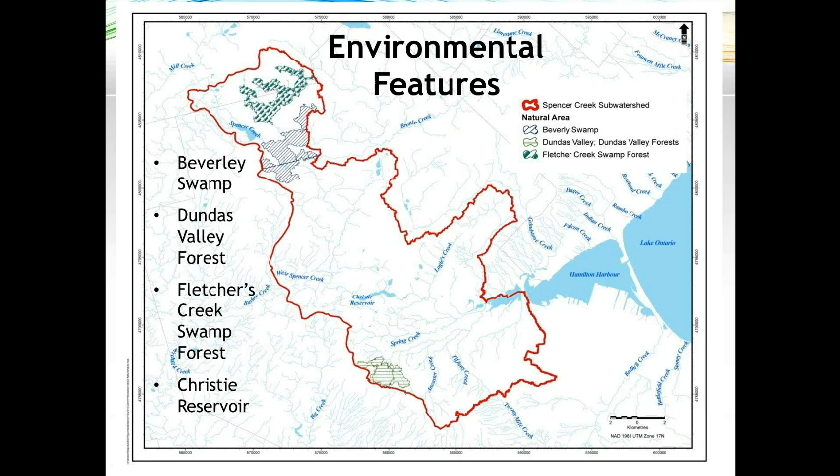So the environmental features that we wanted to look at are some of these large blocks of habitat. And so we have 2 wetland features, the Fletcher's Creek wetland and coldwater stream in the headwaters, the Beverly Swamp, which is a little bit further downstream, the Christie Reservoir, which is a small reservoir within the watershed, and then the Dundas Valley forests, which are closer to the mouth. So each of these features has some unique aspects of it that have potential to be impacted by climate change.

The Beverly Swamp is about a 2,300 hectare wetland, so that's about 5,000 acres. It has a very high quality forest swamp feature, which includes fairly rare Carolinian vegetation, typical of only a few locations in southern Ontario, and it provides significant base flow and water storage functions to the watershed. There also are a number of rare species of birds, plants, and amphibians.

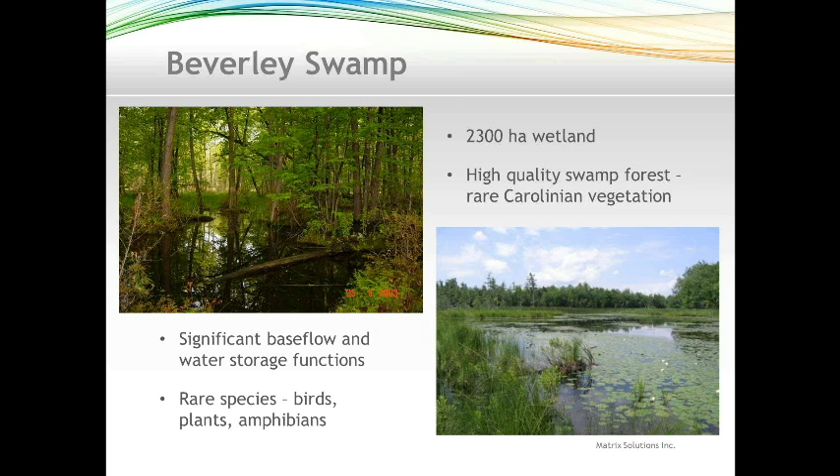The Fletcher's Creek wetland is about 1,000 hectares or 2,200 acres of wetland, and it includes a number of different wetland types such as bogs, fens, and swamps. Also important is that it's connected to a cold water stream that supports brook trout, and these streams are fairly rare or becoming rare in Ontario. In addition, there are already some threats from invasive species.

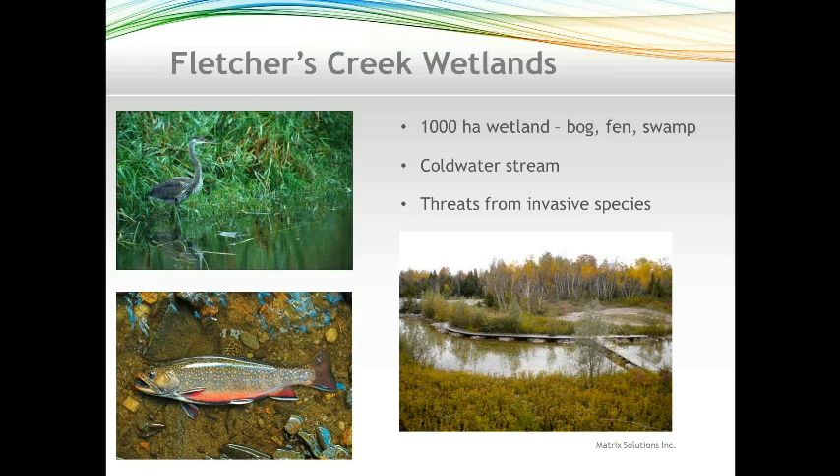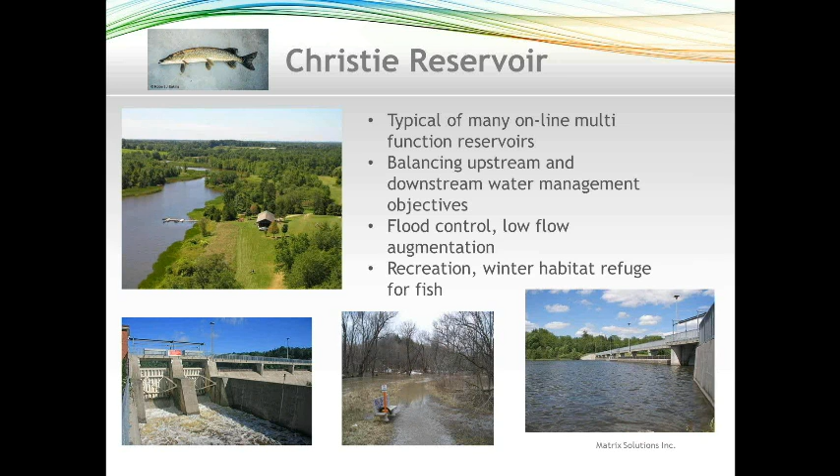The Christie Reservoir is a small reservoir typical of many online multifunction reservoirs in southern Ontario, and these reservoirs have the challenge of trying to balance upstream and downstream water management objectives, so flood control and low flow augmentation in the downstream area, while at the same time maintaining recreation and providing spawning habitat and winter refuge for fish in the reservoir itself.

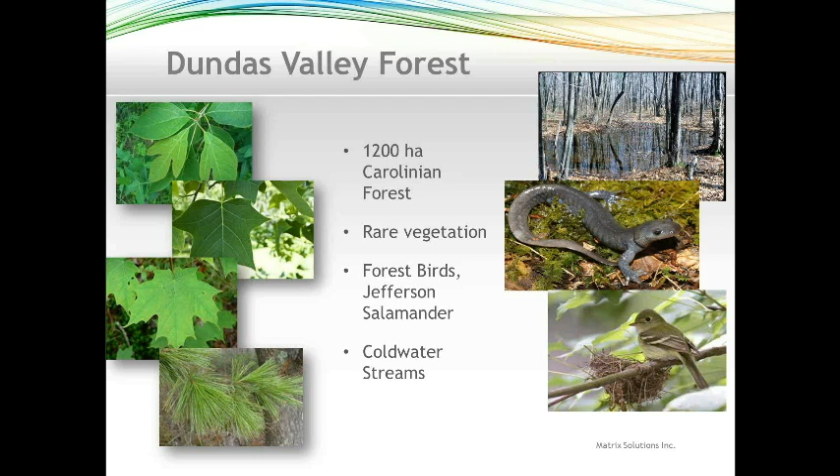The Dundas Valley Forest is a 1,200 hectare or 2,500 acre Carolinian forest in the escarpment area, so the slopes of the escarpment near the lower part of the Spencer Creek watershed. It also has rare Carolinian vegetation and supports habitat for a number of forest birds, and most importantly the rare Jefferson salamander, which survives in or reproduces in ephemeral swamps in the forest area. It also supports cold water streams.

In terms of infrastructure, we focused our work on looking at 14 bridge crossings within the lower Spencer Creek, and here are some examples of 3 of them, ranging from the upper part of the lower Spencer down to the mouth. And I think the important point here is that not only do we have bridge structures that may be affected by changes in stream flows and storm events from climate change, but they also have associated infrastructure.

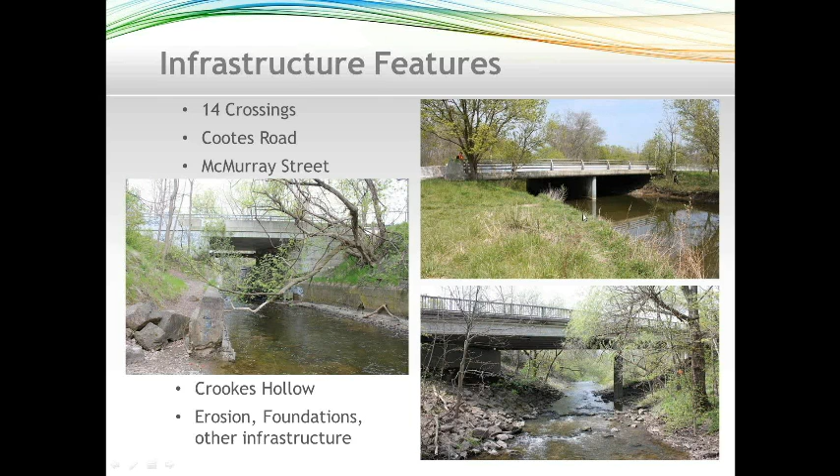So many of these features have water mains or trunk sewers or gas and hydro lines associated with them, or even fiber optic lines. So an impact to the bridge can mean a lot more than just an impact on transportation. And also, as you can see, some of these structures have their piers within the riverbank or within the stream itself, and these structures can be susceptible to erosion. So any changes in the stability of the stream or erosion can impact on the structure.

So to talk a little bit about some results, we're just really getting into the results at this point, but I thought we could share a few things that we've observed. So when we look at future climate projections, we generally want to look at several different models to generate these results, as each model has strengths and weaknesses. And in fact, there can be quite a bit of data variability in the output of these models, and that can cause some uncertainty in terms of the results.

So it's very important not to think that any one model is going to give you the right answers, but rather you need to look at several of them to better understand what's going on. And most importantly, I think there's a significant role for expert judgment in analyzing the results of the models, because they're not really giving you absolute results, but they're giving you ranges. And so one of the things we tend to look at is analyzing the trends and not the absolutes in terms of the model outputs.

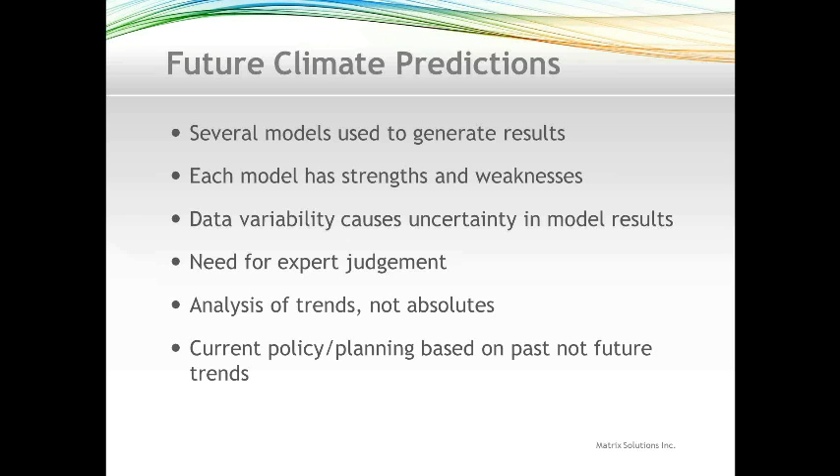And I think one of the important characteristics of using these models is their potential to influence current planning and policy, because particularly in water management, a lot of the current policy and planning tends to be based on analysis of past trends as opposed to future ones. So when we look at these climate data sets that are generated by the climate models, we need to keep in mind that in fact they're predicted values, they're not absolute data. So the standard practice here is to look at multiple models and look at the strengths and weaknesses of each, and to recognize that there is uncertainty in the results.

Secondly, I think when you then take this data and downscale it to be used in hydrologic and hydraulic models, we're basically taking data that's developed as daily output data and turning it into hourly data. And the tendency is that you have a false sense of security about your data. So we have to be careful to recognize that when we're adapting this output to hydrologic models, we need to consider that there still is some inherent variability.

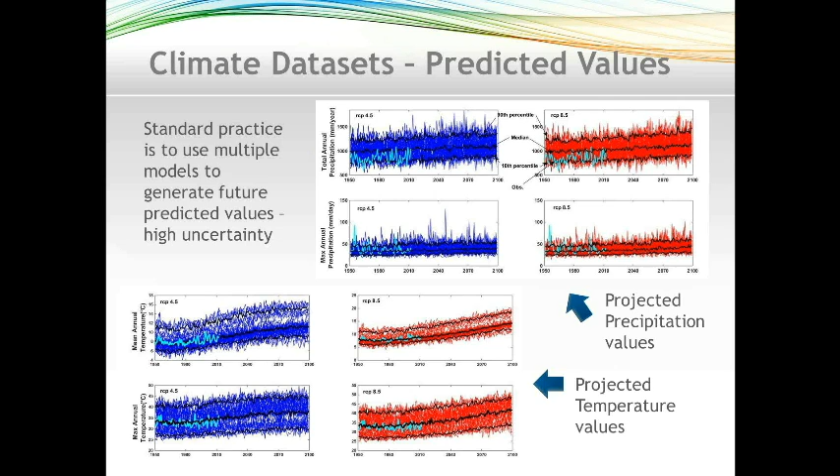So when we look at these projections, while there is uncertainty in the output that's generated, we can generally consider that we have more confidence in some of the longer-term trends in precipitation and temperature, and less certainty in some of the short-term trends. So when we look historically at some flood events in the province, if we look at the far distant past, we often find that many of the storm events occurred as long-duration storms. So, for example, Hurricane Hazel occurred over a number of days. But when we look at the more recent trends, a lot of the storms tend to be much higher in intensity and shorter in duration. And we have less confidence in the climate models being able to predict how those effects might change.

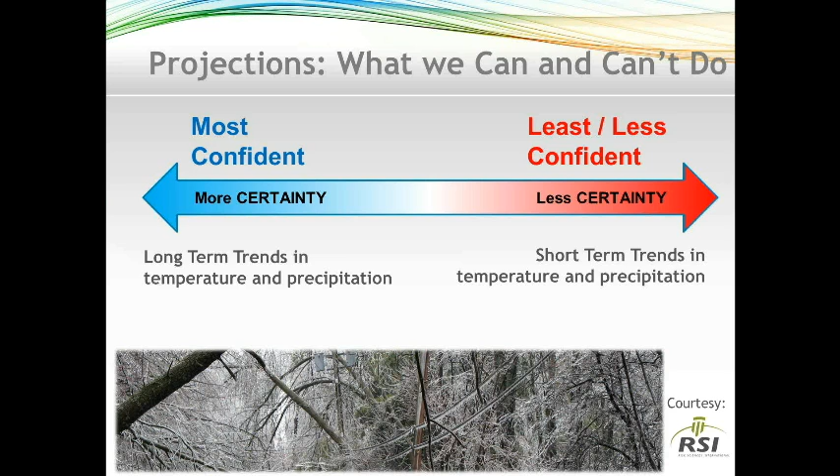So when we look at effects or preliminary results in relation to infrastructure, we can see here an example of a number of different outputs that were generated from the hydrologic hydraulic model. And these are time series flows that show the return frequency or the magnitude of different return frequency flows.

And I think basically what we see here is that while there's a difference in the actual absolute outputs from the various models and the various future time periods, there is a consistent trend. And so we do see that there are increases in the magnitude of events, and generally speaking, the more frequent events seem to show a greater change in magnitude.

But I think what's important here is that it's not just the fact that future storms may get larger, but in fact that these infrequent storms will occur more frequently. And that's sort of borne out by some of the recent events that we've seen.

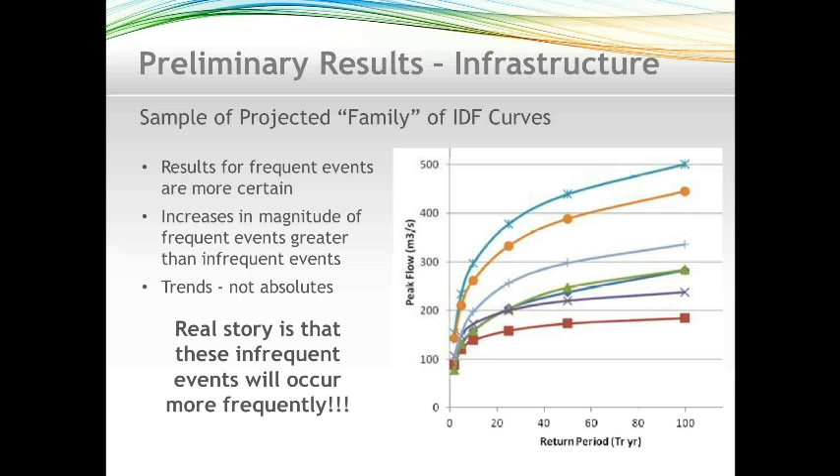To look at this another way, we compared the results from one of the climate models that were downscaled and used in the hydrology model, and looked at how these time series flows changed in comparison to existing conditions. So the existing conditions are basically looking at the historic flow regime and developing the current time series of flows, so the magnitude of the 2, 5, 10, and 25-year flow, and comparing that to the future in 3 different intervals, sort of a near, mid, and far future interval, if you want.

And so again, what we see is that there is consistency in the trends here. There is some increase in the magnitude, but again, if you look at this and look at how the existing 2 or 5 year flow would look in terms of some of these future predictions, those events or the size of those events would occur with greater frequency.

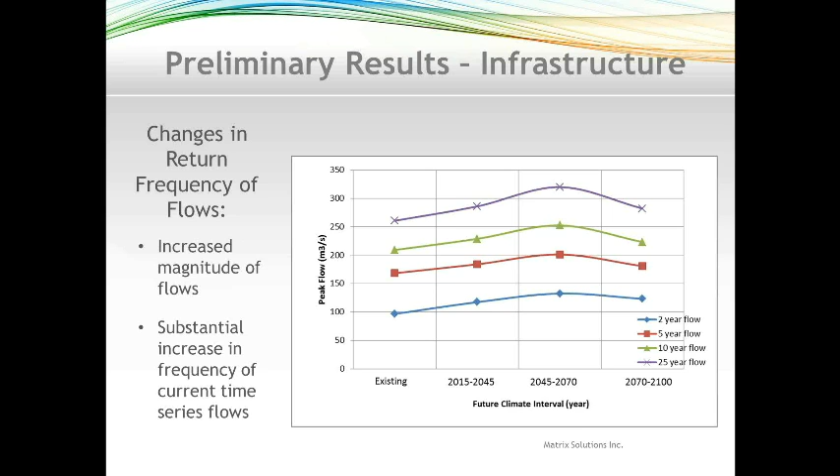So one of the things we looked at was that we recognized that some of the more frequent flows may change more so than some of the less frequent flows, and generally speaking, stream erosion is impacted by these frequent flows. So what this means is that we could have greater threats to aquatic habitats as erosion thresholds change in the channel.

We can have less stability in the stream channel, and this tendency for increased channel instability could also then have impacts on some of the bridge substructures. So that's kind of the nature of the pathway of effect, I guess, that we need to look at. And of course, if these threats were to continue, then they may appear to be subtle changes at first, but they could lead to larger scale effects, such as this erosion failure here.

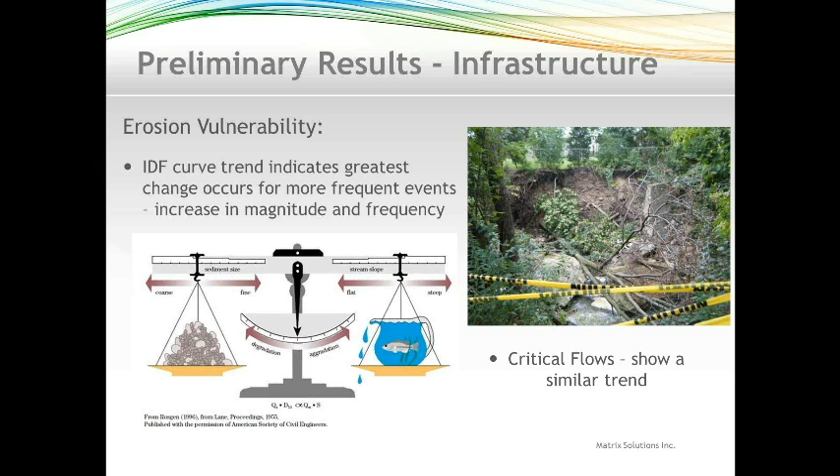Looking at some of the environmental feature results, we do see some trends in terms of increasing mean annual temperatures, increases in the maximum temperatures, less cold weather as evidenced by the fewer days that are below a cold threshold, and increases in the number of growing season days. And all of these factors come into play in looking at how the form and function of some of our environmental features might change.

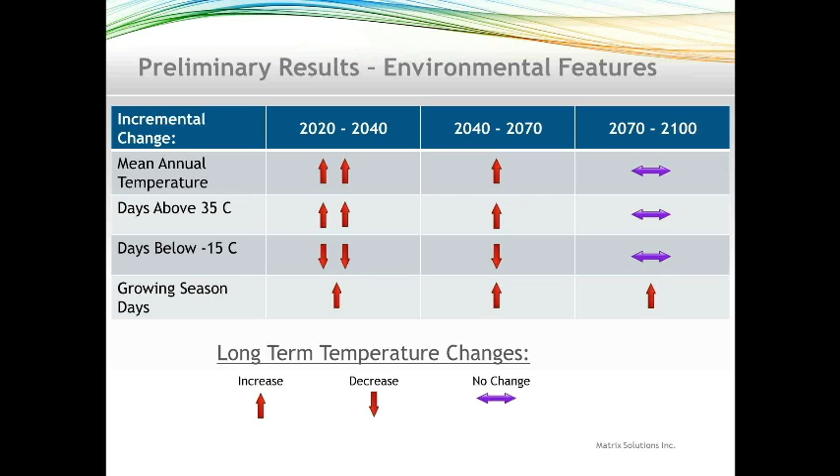In terms of precipitation, we see that there are increases in total precipitation, more days with significant precipitation, and some increases in some of the longer duration storm events.

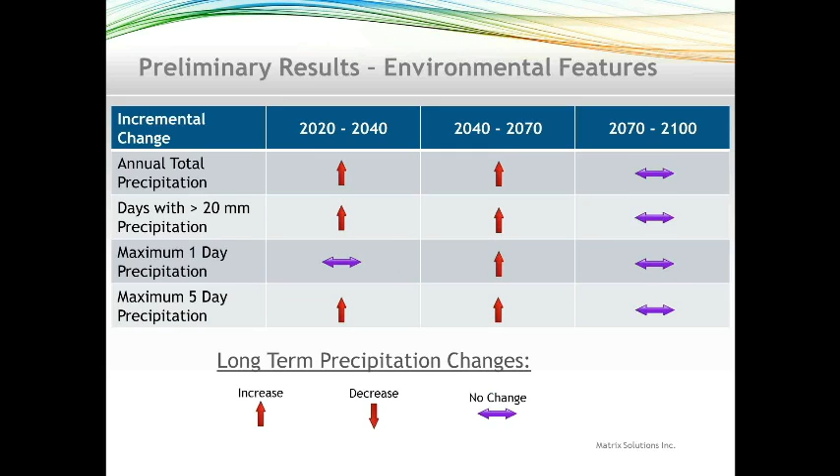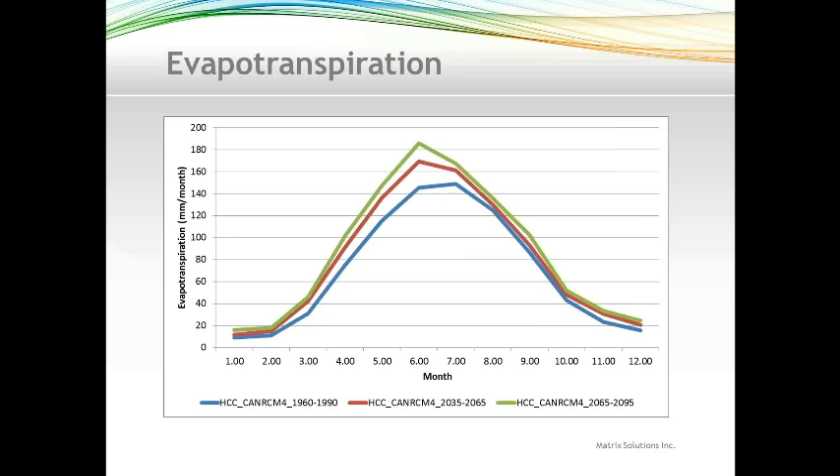Looking now more at the output from the hydrologic model, and considering, for example, the water budgets of these wetland and forest features, we will see or do see an increase in the evapotranspiration. So what this means is that there is more water loss from these wetland and forest features. And this is most significant in the summertime, but I think the other thing that's worth noting here is that there is still some increases in evapotranspiration in the shoulder seasons, in the spring and the fall. So these in total can have a cumulative effect on some of the wetlands.

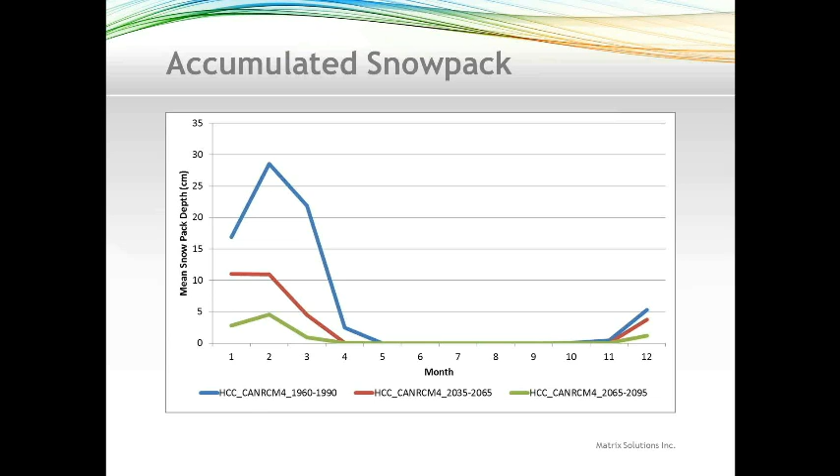And the other thing that this tells us is that it's likely that we're going to have more rainfall than snowfall in winter. So the potential again for more runoff through the winter as opposed to in a peak in the spring. And this can be shown to some extent by looking at the annual stream flow. So essentially the changes in stream flow seem to be a change in the distribution of stream flow throughout the year when we look at monthly stream flows.

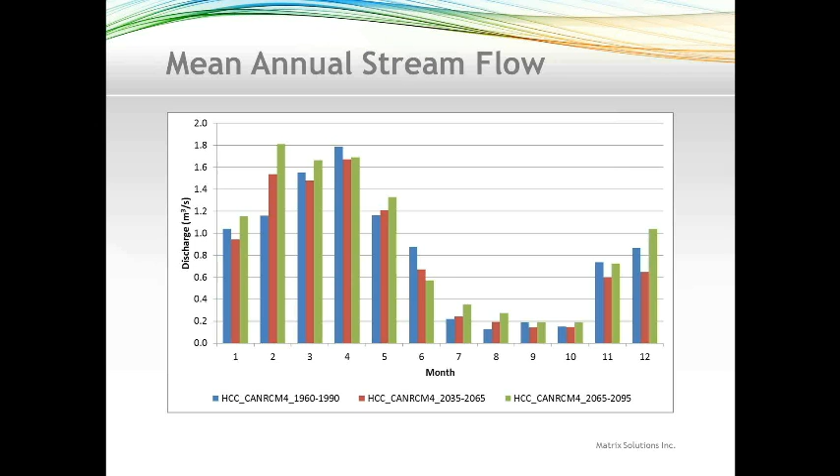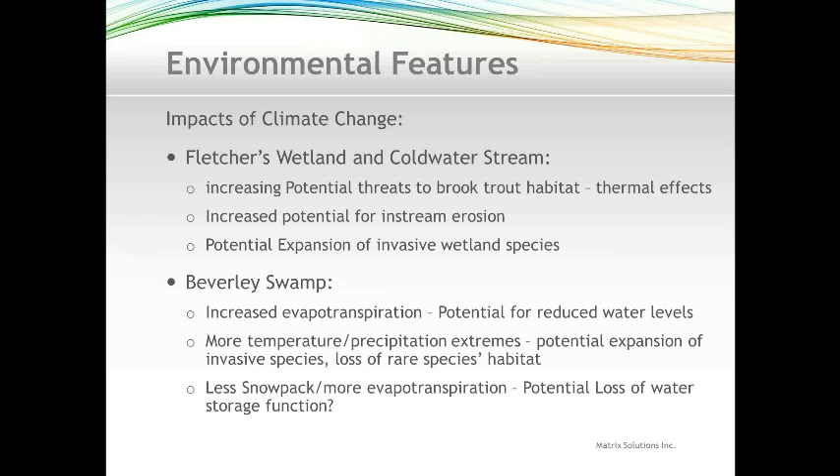So Beverley Swamp, again, the same sort of trend. One of the things here, because it's such a large feature, is that there may be a potential loss of the water storage function of the swamp, which is important in terms of spring runoff and attenuating event flows. With respect to the Christie Reservoir, we can expect more unpredictability in water management. Many of these reservoirs are operated with manual control structures, so the ability to respond is slower.

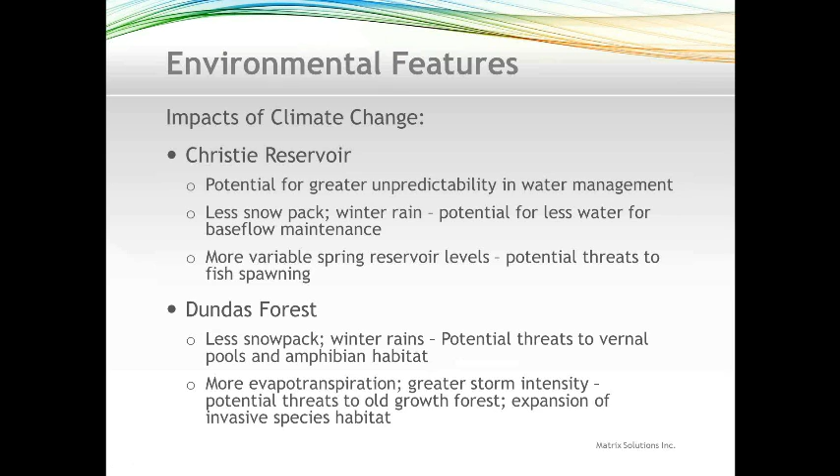So things like less snowpack and a more drawn-out winter runoff could mean that it would be more difficult to ensure that there's enough storage retained for base flow augmentation in the summer, and more highly variable spring reservoir levels, which could threaten fish spawning. In the Dundas Forest, one of the key concerns here are the threats to vernal pools and amphibian habitat. So if we don't have that more extreme spring peak runoff, we may not get the water filling some of these ephemeral pools in the spring that are used for reproduction.

With respect to infrastructure, the increase in erosion may potentially threaten some of the stability of the channel or the bridge substructures. The increased frequency of floods represents potential threats of flooding on roads or to the bridge conveyance capacity, and the concern with respect to associated infrastructure. And there are potential changes to creek hydrology and hydraulics. So what actions would we take? We've just started to develop kind of a laundry list of things to look at.

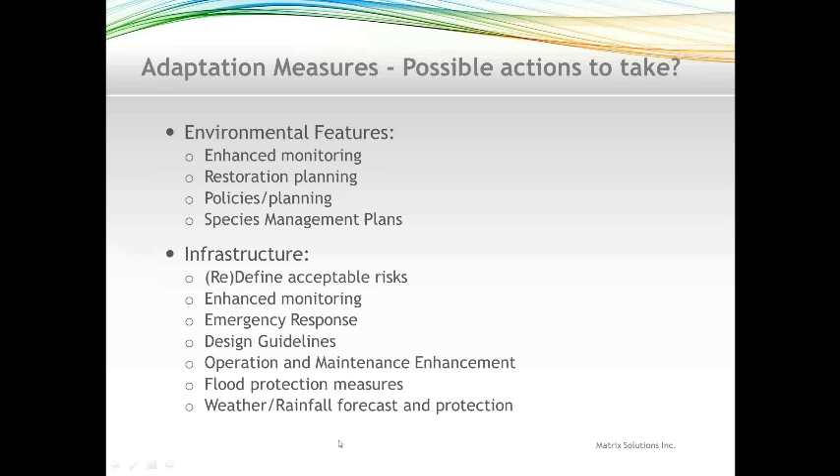So for the environmental features, things like enhanced monitoring, restoration planning, what types of species to plant, policies and planning tools that would protect environmental features, and looking, for example, at more specific species management plans. With respect to infrastructure, we might be looking at redefining acceptable risks, enhanced monitoring, looking more at emergency response, perhaps design guidelines in relation to infrastructure, more attention to operations and maintenance and flood protection, and finally weather and rainfall forecast.

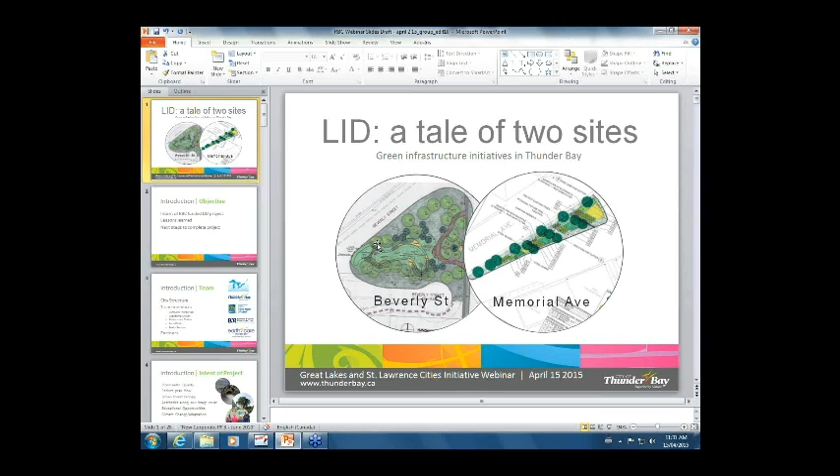As we begin, I'm joined by a great team of folks here around the boardroom who will be giving a presentation. There's 3 others here, and we're entitling this presentation, LID, A Tale of Two Sites. For those of you who don't know what LID is, low impact development, I'll be explaining that in a few moments. But those presenting with me this morning, we have Werner Schwar here, who's a parks planner for the Parks Division here. We have Gail Willis, a senior technologist in engineering, and Lee Amelia, who's our urban forest program specialist, Parks Division, and they all bring different levels of expertise to this project, and so we felt it would be important just to have everyone have a few minutes here to pitch in their expertise.

So, as you may be aware, we received funding through the RBC Blue Water Project through the city's initiative to contribute towards the installation this spring of a new low-impact development on Memorial Avenue in Thunder Bay.

And so in today's talk, we're going to mostly focus on this new site, which is on the right here of your screen. But we also wanted to capitalize on the comparison between this site and an LID site that was installed pretty much about 50 meters away. That was completed in 2013. And look at the lessons learned.

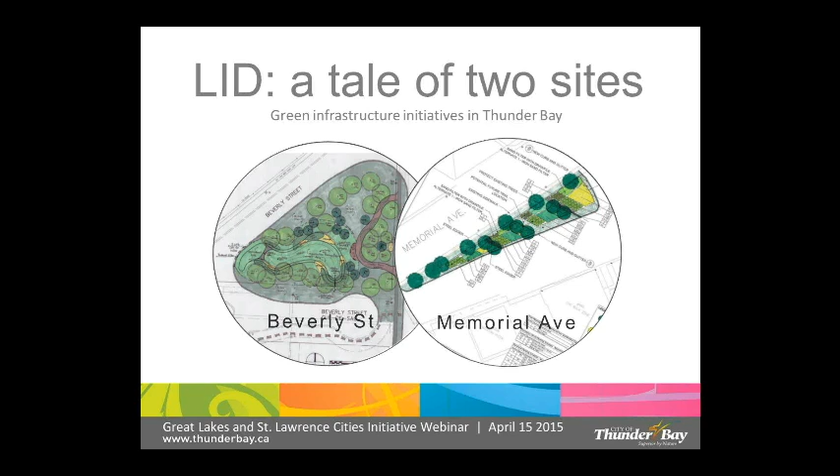So today, the objective is we just wanted to provide an overview of the intent of the RBC project. We wanted to talk a little bit more about the lessons learned regarding these 2 LID projects and how this can inform other municipalities in their planning. And then the third thing we wanted to cover is just the next steps for this RBC-funded project and a chance to see some of the technical details behind the scenes.

So as I introduce the players involved in this project, I wanted to preface this slide by talking a little bit about the current city structure, because I think it's important. Right now in Thunder Bay, there's no one division responsible for stormwater management and LID development at the moment.

And so an ad hoc team in 2012 from a number of us was set up from staff level with permission of the senior management to explore more opportunities for low impact development installations and to educate ourselves internally before we would expect our contractors to start building them. So what's exciting is that in the near future we are anticipating a new division who will be focusing solely on LID and stormwater management.

So our team members consist of about 8 city staff, all from various sections of the city: EarthCare Thunder Bay, our engineering and environment and parks division, and realty services. Only some are represented here today in this presentation.

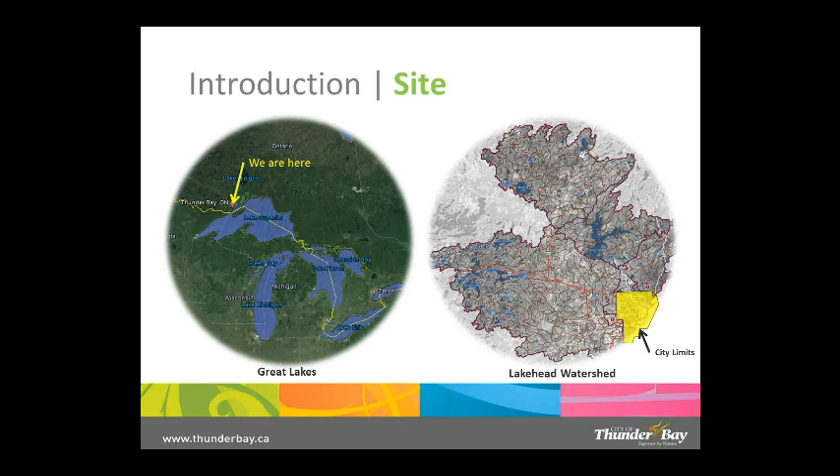And where is our project within the city itself? The site is located within the urban area of the city in the north end of the intercity area, and it's a flat, poorly drained area which used to be muskeg, and I don't think it gets any better than that for an ideal place for an LID site. And so on the right-hand side here you can see this new Memorial LID project is slotted for installation this spring, and this site essentially drains directly into Lake Superior through a combination of storm sewers and engineered channels, concrete channels and ditches. So it's a very important site.

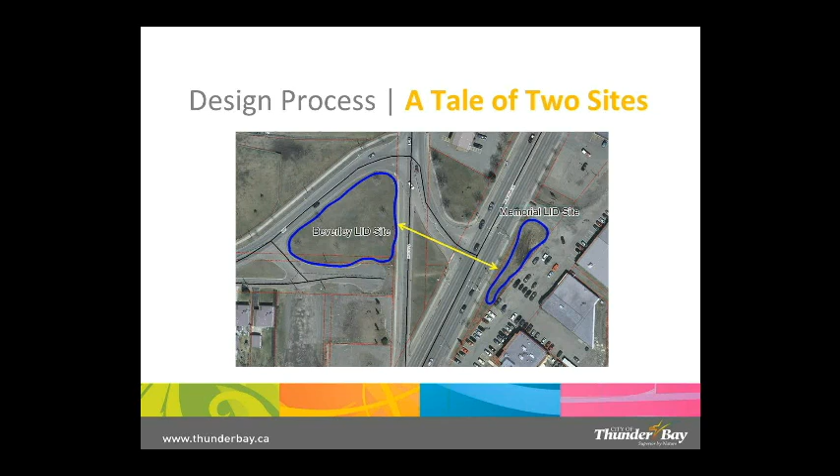All right, so I'm going to be talking about the differences between the past project that Brad was mentioning a few years ago, called the Beverley LID site on the left, and our new Memorial LID site on the right. That Beverley site was really our first foray into a true LID, and was done all in-house, myself being a landscape architect, Gail handling the engineering, and we did that through just our own knowledge, and the project worked out reasonably well. This other site, Memorial, we thought, well, we did it 50 meters away. What could be the problem doing it again on the other side? And lo and behold, when we actually got into the project, there were a whole lot of differences that required the design to be quite different, even though they're really close together.

The soil itself was different. The Beverley site was dry coarse fill material, and once we got into the Memorial site, the soil sample indicated silt and muskeg. So again, not as suitable for infiltration. The topography, again, was different. We had a hill situation on one versus a low wet area on the other. So the positive was we required less excavation, but we needed much more detailed grading and soil investigations to make something work. Utilities: we had a clear site on the Beverley Street side on the left, but we actually have two 600 mil diameter storm sewers going right through the middle of this site, and they're close to the surface, which again posed a very significant design constraint when we got into things like excavation and cover of pipe.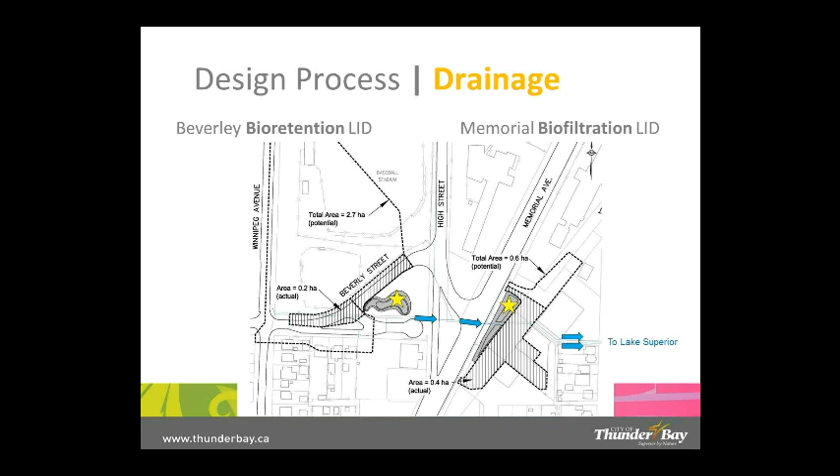The Memorial site has been designed as a two-cell bioretention filtration system where each cell outlets to one of the storm sewers. Ultimately, both LID sites drain to Lake Superior through the existing storm sewer system, outletting to a downstream concrete channel and discharging directly to Lake Superior.

In this slide, we are showing the two LID sites in more detail. Both facilities accept stormwater runoff from direct impervious areas. However, flow to the Beverly Street is channeled along Beverly Street by the existing curb and gutter in a traditional manner, and flow to the Memorial Street LID is conveyed over the parking lot surface by sheet flow.

Now, the ways that these two LID sites accept stormwater runoff are similar. Both were designed to have curb cuts, and stormwater would enter the facilities into a pre-treatment area. However, the way the pre-treatment areas have been designed are different. For the Beverly Street LID, we removed approximately 15 meters of the existing curb and gutter and replaced it with new curb and gutter with curb depressions to allow flow from the roadway to enter the pre-treatment area.

The pre-treatment area is where most of the road gravel from winter maintenance and any other materials contained in the runoff will drop out. A rock weir separates the pre-treatment area from the bioretention facility, and the bioretention area consists of engineered soil mix, pea gravel, and washed stone, and stormwater is filtered through these layers. Any water that has not infiltrated through the native soil is collected through a subdrain system, ultimately discharging to the existing storm sewer to the south.

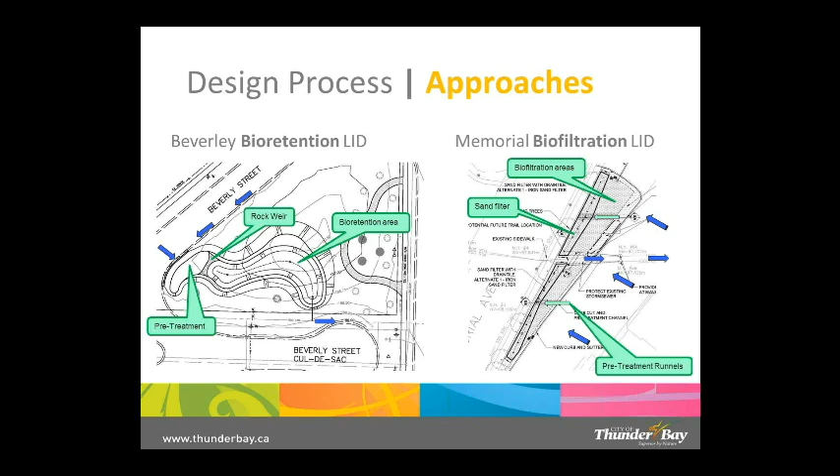To construct the Beverly Bioretention LID facility, we excavated over 600 cubic meters of native soil. This was due to the area between Beverly Street and the cul-de-sac. It was essentially a rounded mound that was left there and sodded during improvements to Beverly Street and High Street in the early 1980s. Groundwater was seen during excavation approximately 2 meters below the original ground elevation.

The excavation was then backfilled with a layer of washed clear stone, and we placed a perforated subdrain on top of the first lift of stone. For the next layer, we placed pea gravel, and over the pea gravel, we placed a non-woven geotextile to separate the stone from the engineered soil mix. The soil mix that was placed was a mix of 85% sand, 10% silt and clay, and 5% organic matter. Then we spread a special bioretention seed mix over the soil with an erosion control blanket, which held the seed mix in place while it germinated and took root.

The Memorial Biofiltration LID facility is situated about half a meter lower than Memorial Avenue, and the groundwater elevation is about half a meter below the existing ground of the site. So for this reason, the Memorial LID facility was designed as a filtration system, which would include more plants and shrubs to filter and clean stormwater runoff.

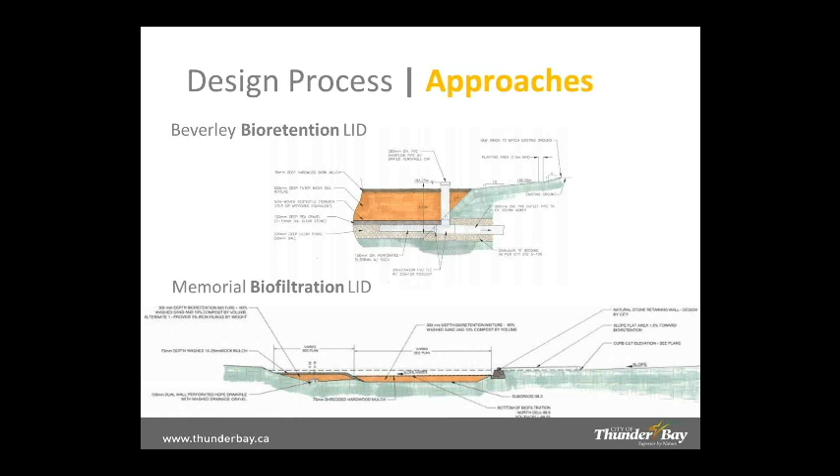Thanks, Gail. So continuing on the differences of the two sites, at our Beverly Street existing park, we wanted to keep it much more park-like, so a majority of trees, shrubs, and grass and herbaceous material that would retain that open look, park-like quality. Whereas the Memorial site was much more contained by roadways and parking areas, but also adjacent to the business. And one of the main businesses adjacent to this site is a hunting and fishing store. So we thought it would be quite interesting to have the plant material be much more native and reflective, and give that business an interesting foreground.

So the planting design was much different in that instead of grass and seed mix, it will all be trees, shrubs, and native herbaceous material. Trees such as the tamarack, shrubs such as dwarf bush honeysuckle and dogwood, and a range of herbaceous from wet material like iris to dry material like yarrow. So the difference being in the Memorial site, we have wetland in the bioretention areas, but where the sand filter is, they would need dry species. Whereas in the Beverly site, a more homogeneous planting was acceptable.

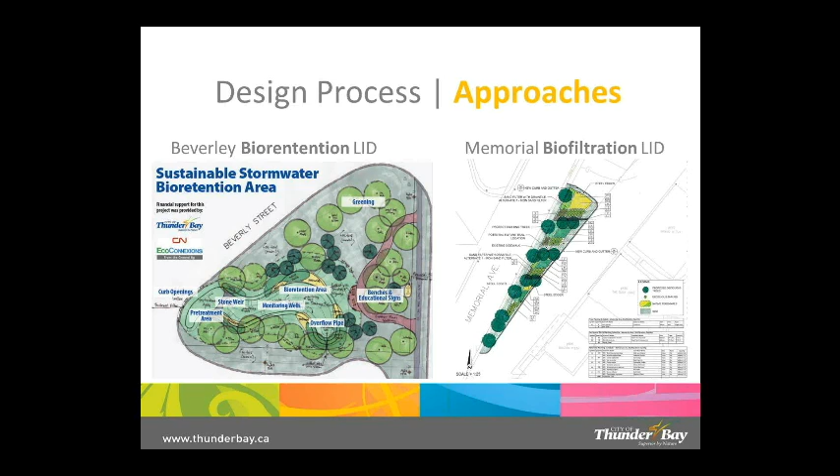And this alone presents many more design challenges, having these different types of planting in a small area, but recognizing that it also has to look good from the business's perspective rather than just function as a stormwater amenity. And I'll pass it over to Lee now to talk about our lessons and budgets.

Regarding our external funding sources, CN EcoConnexions contributed to our Beverly site, while RBC Blue Water contributed to the Memorial site. And it's noteworthy that these projects likely would never have gotten off the ground without external funding.

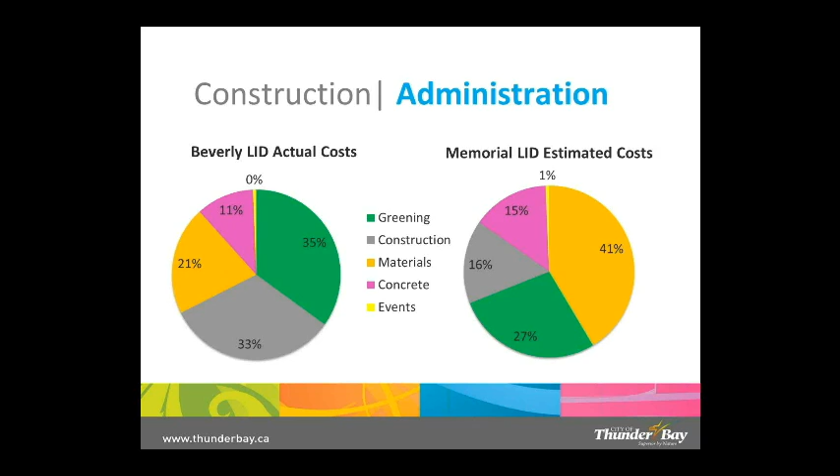Successful LIDs require the teamwork of experts from several disciplines. Our internal LID team has learned that every location is unique and there's no cookie cutter or one-size-fits-all designs when it comes to implementing these facilities. Our two comparison sites are 50 meters apart and required completely different LID approaches. Every LID site will have its own unique characteristics and require people to think outside the box and work together.

Ongoing training and development for internal staff is required, since these designs are fairly new to Thunder Bay. They will take time to perfect, especially in relation to our city's present infrastructure and climatic challenges. We've also learned that site analysis prior to design is important before committing to any specific location.

Our internal engineering field staff mapped out all the curved lines for the Beverly facility, while the sewer and water crew did all the excavations according to the design specs, with on-site supervision from our technical engineer. This is not a typical workday for the city crews who normally install and maintain sewer and water connections and build straight roads. Being involved in these projects and learning about LID concepts is an excellent opportunity for internal city staff, which will help us save costs down the road.